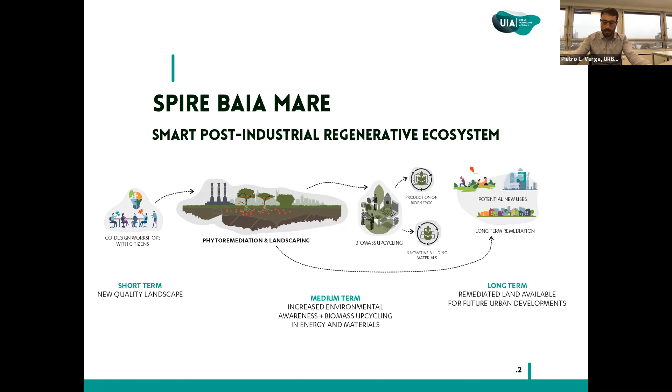And then we will also have, as a discussant, Amaya Celaya Hernandez, who is the Urban Innovative Action expert. So I will just give you a brief introduction.

Pol Merino is the managing director of Honext. He has a background in biotechnologies, and since 2015 is leading the industrialization of Honext, which is an industrial biotech startup from Barcelona that transforms industrial waste into new sustainable materials. They're implementing a growth strategy following circular economy principles and based on finding synergies with local industries. Pol will discuss upcycling paper mill waste into construction materials.

After Pol, we will have Tim Volk, who is a senior research associate at the State University of New York College of Environmental Science and Forestry in Syracuse, New York, USA. He has over 20 years of experience working in the fields of forestry, agroforestry, short rotation woody crops, bioenergy, and phytoremediation. He is responsible for a series of research projects focused on the development of shrub willow biomass cropping systems as a feedstock for bioproducts and bioenergy. He's also actively involved in research and development of sustainability assessment of bioenergy systems, life cycle assessments of willow biomass crops, and woody biomass from forests.

Tim's presentation will focus on the WILLOW project that he carries out at SUNY, and he will discuss energy and other applications of Salix viminalis.

And then, last but absolutely not least, we have Alison Mears, who is an AIA architect, associate professor of architecture, and the co-founder and director of the Healthy Materials Lab at Parsons School of Design in New York. She is the co-principal investigator of the Healthy Affordable Materials Project, a multi-year grant funded by the JPB Foundation. The project is a coalition of 4 organizations who work together to incorporate human health as criteria for evaluating building products to improve the interior environments of affordable housing.

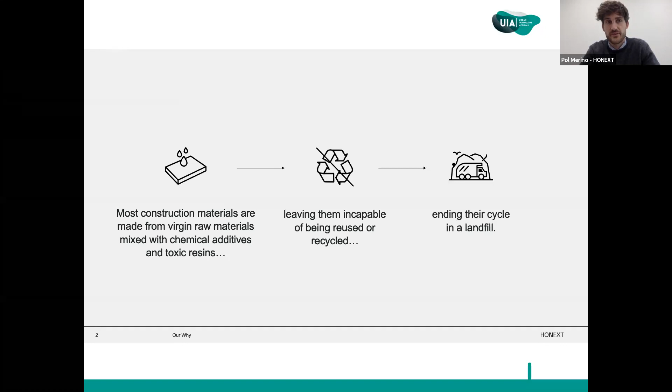If we can move on to the next one, please. So at the very end—you can go quickly through this and the next one—we are eating mountains and forests, we are destroying them to... can you move to the next one?

To end up filling landfills - in Europe, as an average, each citizen generates 1.87 tons of construction waste a year. And the construction industry itself generates one third of all waste in the globe.

To our understanding, that's totally unsustainable in the long term, and that's the main reason why we started with Honext.

Honext, what we do is pretty simple. We manufacture a material made out of 100% waste, ensuring during the process that we analyze everything we add to it to guarantee its recyclability at the very end of its use.

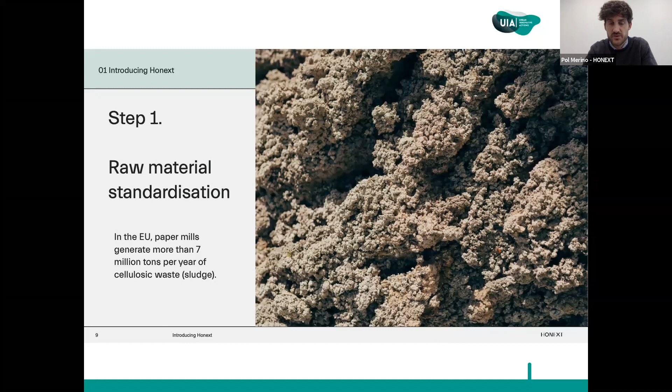Once we have this waste characterized, what we do is add a cocktail of enzymes that cleans this fiber and maximizes its ability to link with other fibers.

Cellulose fiber is an organic compound that has the natural ability to link with another fiber through hydrogen bonds. So the way we designed our process was, instead of adding resins to generate a strong material, to maximize the amount of bonds each fiber can make - so we get a healthy material without compromising its sustainability. That's why we use enzymes to prepare the fiber.

Once the fiber is ready, we undergo a mechanical transformation. If you can go to the next slide.

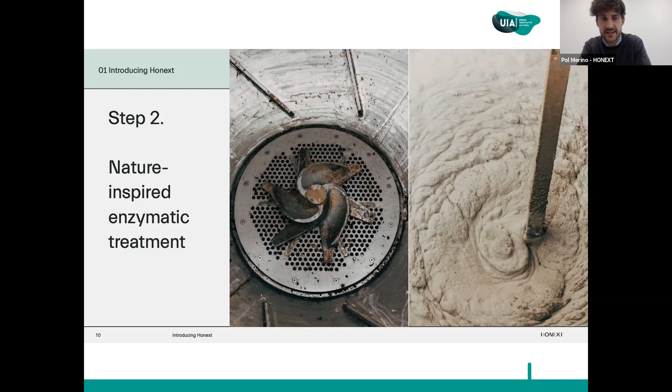We have a solution of now standard, clean, ready-to-link cellulose fibers in water, with a percentage between 3 to 5% cellulose in the water dilution, and we have to shape it into boards. That requires mechanical separation of the fiber from the water, which we do through positive pressure as well as vacuum technology.

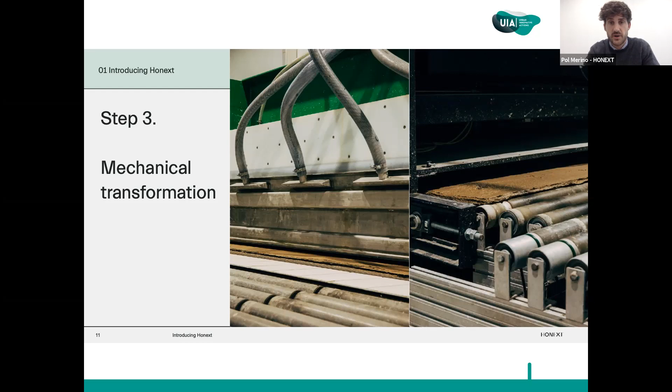At the very end, we have a wet board with around 50 to 60% water content that we need to dry in a drying tunnel.

This is one of the trickiest parts of our process. Cellulose, as it links together, bonds with other fibers when you extract water, especially during the drying phase.

If the way we extract water is not homogeneous along all the thickness of the board, the fibers start to link with other fibers in a heterogeneous way, and thus the board bends. Therefore, we have to have a pretty smooth drying process to achieve a board at the very end that has a perfect flatness.

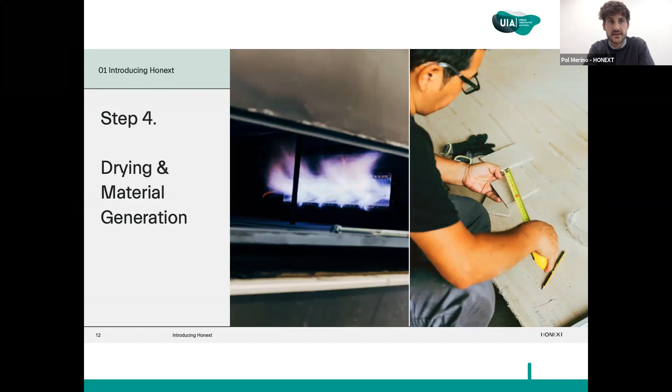To summarize a bit the process, the key of it is that we don't need any resins. We just use 100% of waste fiber together with enzymes, water, pressure and heat to generate a new material. The no need for resins, first of all, contributes to having healthy environments.

Other materials, especially wood-based materials, use urea formaldehyde resins that have emissions of volatile organic compounds. One of them is formaldehyde, which has been proven to provoke cancer in human beings. Especially in spaces nowadays where we've improved construction to be much more efficient and insulated thermally, it's critical to have inner spaces without volatile compounds in the air.

But also the resins, as we explained before, they contribute to other issues. A resin does not allow, most of the time, recovering a material or recycling it, and that's why we use none.

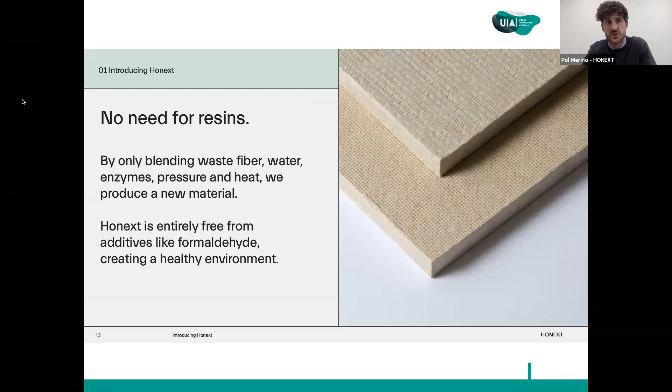If we can move to the next one. That, till now, is our product and the process of how we do it, but we developed that in a laboratory and in a pilot plant within the university. When we had to scale it up to industrial scale, we thought it's not just the product that needs to be sustainable, but the whole business model itself. So our first question was: where to set up a factory with the lowest environmental impact possible?

And we decided to put it in a landfill. The factory is placed in a landfill where all the process utilities we consume - gas, electricity, as well as water - come from waste. In terms of water, we have a water treatment station, so everything we consume at the very end is cleaned up again and comes back into our process.

If we have to highlight some of them, first of all, there's the sustainability of the material - we are Cradle to Cradle Silver certified, and we aim to achieve gold level in the next renewal. Secondly, not only do we not have emissions, but we also greatly improve the acoustics of inner spaces.

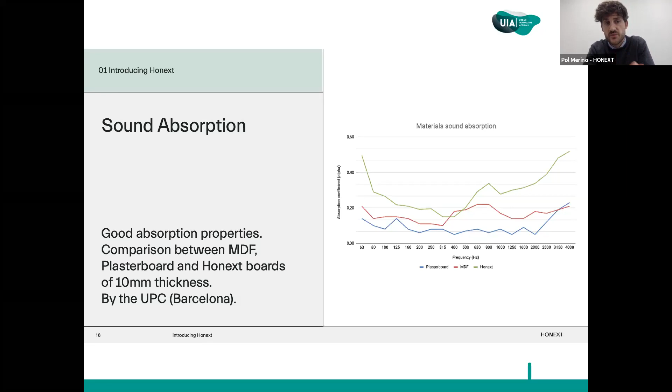And finally, reaction to fire. This is very important to highlight for us because using waste - in our case, fiber - it also has other inorganic compounds that are used in the paper production process. We could see this as a disadvantage because at the very end it limits our mechanical strength, but it also gives us a very good reaction to fire.

Without adding any additives, our material is a Class C reaction to fire. That allows us to be used in most construction projects in Europe, and now we're working to achieve a Class B, which is the maximum we can reach with a bio-based material without adding toxic or chemical compounds.

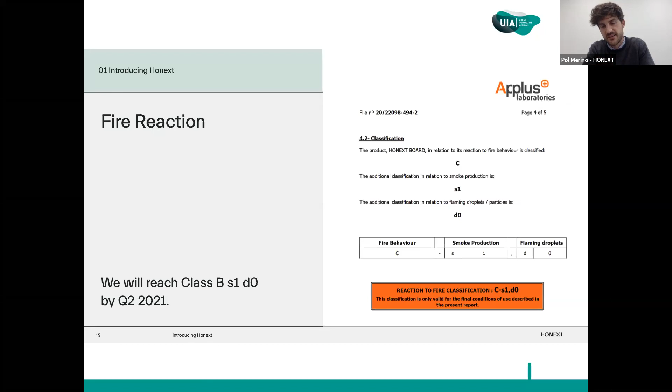Finally, as a market, our target is MDF. Clearly, it's a really complicated market. MDF, in terms of technical properties, is an amazing material, but that's it - in terms of sustainability, it's a completely linear economy material.

So in Europe, to give you a rough idea, we consume 16 million cubic meters a year of MDF, of which 2.5 million are consumed in construction. Our factory right now has a capacity of 2,000 cubic meters a year. We do believe we have a lot to improve in terms of materials.

All sustainable materials, or at least the way we see it, we start with the disadvantages, and it's that we cannot use as many additives as MDF would use to improve properties, but there are many options available. It's a matter of trial and error and improving, and we do see a lot of potential to end up replacing this type of fiberboard.

Here you'll see some of the last projects we've done. As I said before, it's a material for internal partitions in construction. It can be transformed using the same sanding and cutting machines as any fiberboard - that's not a problem. Obviously it's slightly different as it has no resins, so sometimes it behaves slightly differently, requiring just small adaptations in the transformation processes.

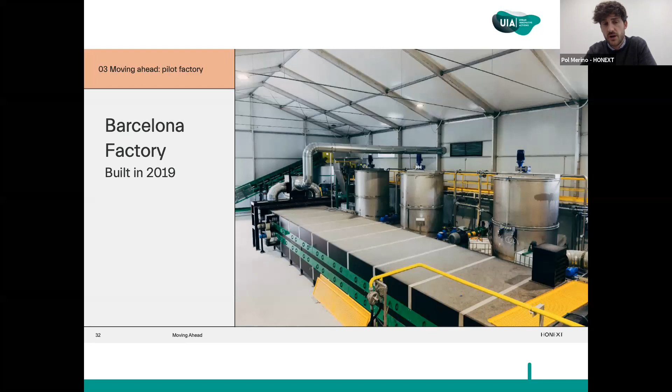That's what we think—it makes no sense to destroy mountains to fill up landfills. We need to achieve a future where landfills become mines, because there's a lot of waste that can be reused. The current situation highlights even more that things should be made locally, or on a regional level, to avoid the huge environmental impact of transport.

This is a short summary. First of all, we've been funded by the European Commission within the Horizon 2020 program. It has helped us a lot—they funded the startup of the factory as well as the initial market introduction. This has allowed us to really focus on what brings value in the mid and long term, not just the short term. We're also supported by some important groups, especially in the construction sector here in Spain. Well, that's about it.

If you have any questions, I'm more than happy to answer. Thank you. So we are in.

Thank you very much, Pol. That was really interesting, seeing how from ideas you can really make a difference. And that was an interesting point on the difference and the need to match the coolness, the hype that new materials generate for designers, with the technical feasibility problems and difficulties faced by the carpenters and all those actually called to practically use the materials.

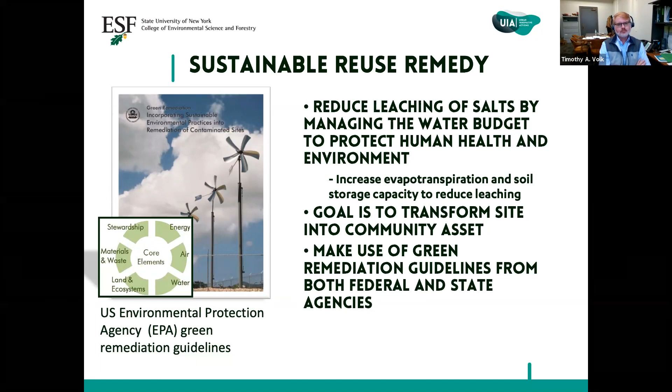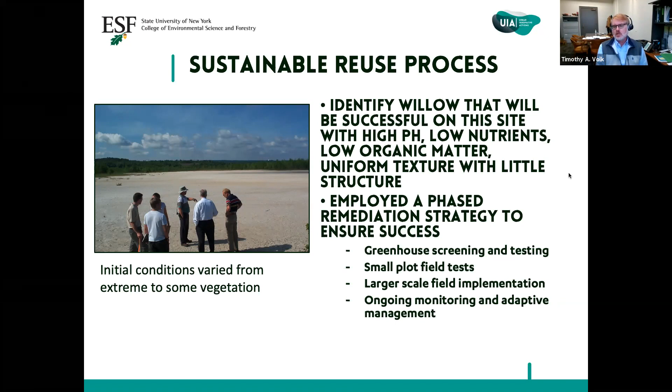There's no textural structure to this soil to work with. It's very challenging. We employ what we refer to—what colleagues I work with have developed and referred to as a phased remediation strategy. So we work through a series of incremental steps to try and make this work, adapting and modifying as we went along. I'm going to walk you through a few of those steps, and then we'll talk about end use applications when we get to the end.

Okay, so why willow? There are a number of attributes about shrub willow that make it appealing. It's not the only species, but for what we wanted to do in the package being created, it had the right attributes. It's a pioneer species that works well and grows naturally on disturbed sites, so it's used to dealing with harsh, unpredictable conditions. It's easily propagated from woody cuttings, so it's easy to scale up and multiply fairly easily. Willow has a high transpiration rate.

Some people might say it's an inefficient user of water, and that's true—it uses more water per kilogram of wood that it produces than most other woody species. In this environment, that's exactly what we want—we want it to pump off more water. You can harvest it, cut it down, take the biomass away and use it—we'll talk about that at the end of the presentation—and it will just sprout back. Once you plant it, you can manage it in a 3 or 4 year harvest cycle and have it keep sprouting back. You don't have to replant it, and it's relatively easy to manage.

There's huge genetic diversity in willow—over 300 species around the world. We had been working on willow here at the university with some other colleagues for 10 or 15 years already, so we had a fair amount of experience in terms of what its potential opportunities might be. There was also a history of willow being used in this region for the basket making industry. This was the heart of the willow basket making industry in the early 1900s, and you can still find those willows across the landscape if you go out and look for them.

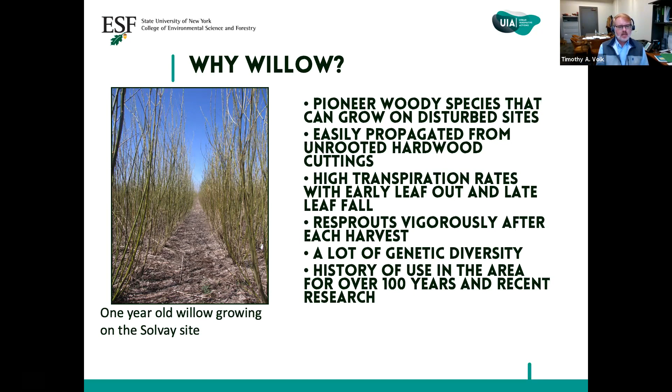We had organic materials from a local brewery, from a pharmaceutical company, from the wastewater treatment plant, and from another company that was producing biosolids. We tried these different mixtures in the greenhouse to first get an idea of what might work. The best one was from the pharmaceutical company, and it really worked well. Unfortunately, a few years later, that company decided to move their production process to another location, so we lost that source material—but you adapt and move on.

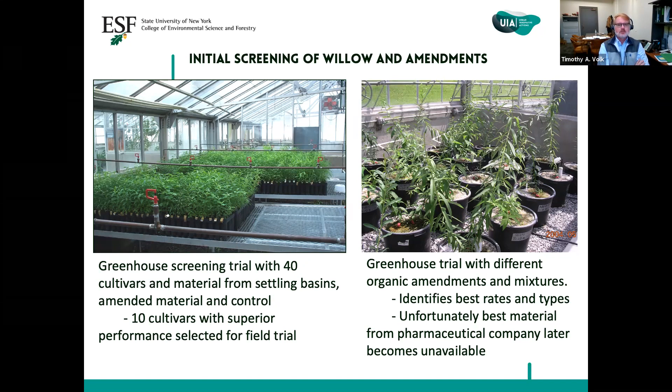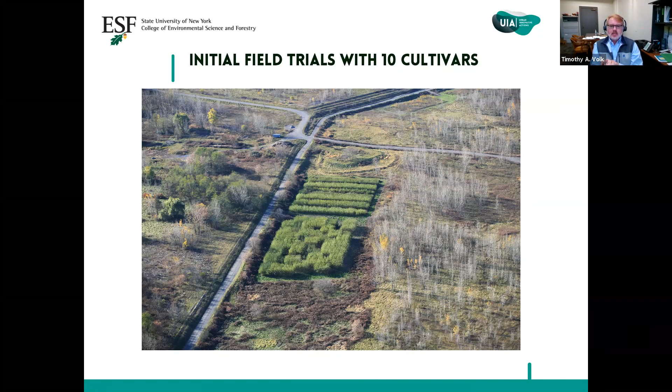Next slide, please. So the next thing was to go to the field. Remember, we had these 10 cultivars that we identified. This picture at the bottom shows this block with different squares in it—those are the 10 cultivars from the greenhouse trial put out into a field trial. It's fairly clear there that some things are not working. So it's important to follow this through the process—what works in the greenhouse in a controlled environment is wonderful, but we eliminated 30 varieties that probably weren't going to work in the field. If we go to the next slide, I'll show you some data that this did not work so well in the field for some of these varieties.

So you can see this one I have circled called SV1. That actually produced the best in the greenhouse. By the second rotation, it was totally dead. So you learn lessons as you go along. SV1 did well in a greenhouse environment, was controlled and watered regularly. You put it out in a real environment where rainfall is sporadic and you have dry periods and other pests that may be an issue, and it didn't do well at all.

However, there are a number of varieties. That green bar is the sort of yields and biomass production we get on good mineral sites in the area. And so we've got a number of varieties that are growing just as well as they do on mineral soils in the area. So that's success. We can move forward to the next stage.

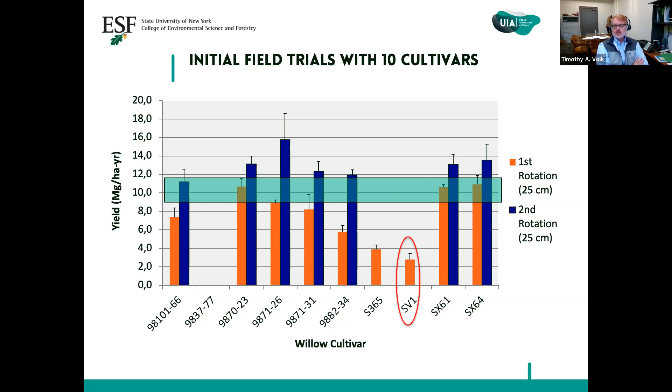Next slide. So the next thing was to go out and figure out this organic amendments question. And so we take that greenhouse trial, and here's another trial we go out, and we put out blocks of different amendments. Lots of interesting stories around this, around working with the community and the timing of it and their concerns about odors and lots of issues like that. And so it took lots and lots of interaction to even get to this stage and to make this work. But we put this trial out and we learned some lessons, and it allowed us to make some recommendations then to begin the commercial scale up, larger scale up of this material.

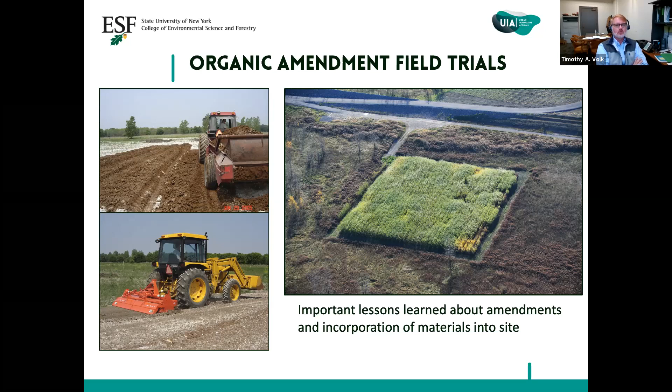So if we go to the next slide. So here it is. You can see in that picture on the right, that green plot on the left is this organic amendment trial that I just showed you. So that's where we did that testing with 8 different organic amendment treatments in there, plus a control.

Then we go across the road there, and we tackle this very challenging site that I showed you at the area. So at the beginning, this is this area where there's virtually no vegetation. The company challenged us, Honeywell challenged us and said, look, if you guys can make it work there, we'll believe you, right? And then we'll talk about expanding it to other areas. So that's where we started.

And you can see that there's 2 different colors being mixed in here. This sort of brown, dark brown, and a dark material. So we're still testing 2 different organic materials out here because we're not entirely resolved. There's a couple of things, which one works the best? They both seem to have potential. And then there's issues about supply down the road.

So if we're going to scale this up over a couple hundred hectares, having some flexibility in your organic waste material that you're going to use is beneficial, because maybe the facilities that are there are not going to produce as much as consistently over time. And so we wanted to maintain those options.

In the end, we've actually modified in the last few years, and we've started actually mixing in horse manure. There's a fair amount of, for recreational purposes, horses maintained in the central New York area. So there's a lot of horse manure. There's a company that started collecting that and mixing it with the brewery waste that we were already using. And so that's the material we've been using for the last few years.

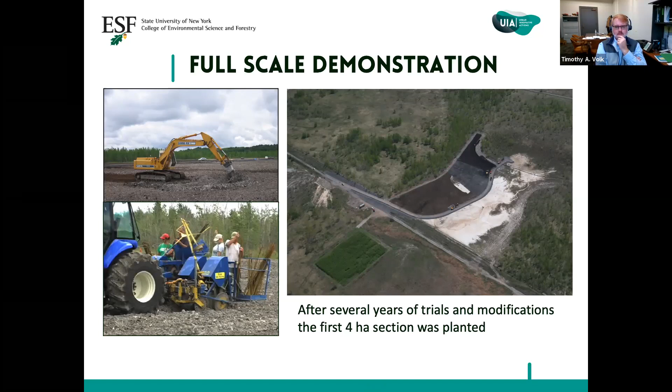So where are we at now? We've now installed the first 40 hectares of this WILLOW ET cover, and you can see a picture of that here. This is what is called one of the settling basins. There are several more. There's another 140 hectares of area that this could be applied to. We are currently in the process of going through a regulatory review with the state agency for them to determine whether this is an acceptable solution to the problem or not.

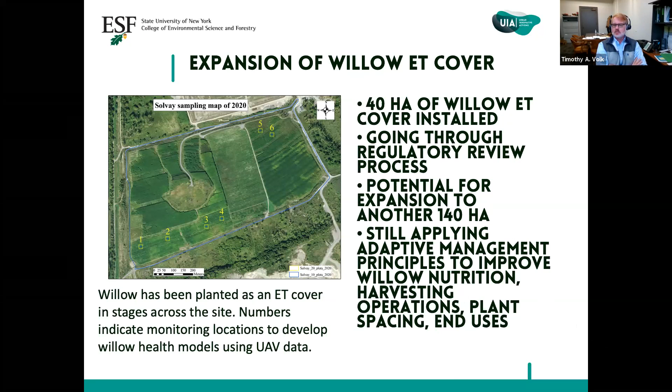We're still learning. Those plots out there, we're out collecting data to try and optimize willow health and willow growth, and now using UAVs to try and do that at the scale of area that we have now. Go to the next slide.

So we've done other things, right? There's lots of things we've looked at. We've looked at, well, here's greenhouse gas emissions. And so clearly big benefits to be had here.

So what you have here on this scale on the y-axis is global warming impact in kilograms of CO2 per hectare of land where you put a remediation practice in. You have the willow ET cover versus a typical clay cover or geosynthetic cover. That green line through the willow ET cover shows you it actually has a negative carbon footprint over a 30-year period—it's taking up more CO2 than you're expending in fossil fuels to run harvesters, planters, or spread organic matter. So it's got a negative footprint versus very large footprints. There's big benefits to be had here.

And we're now here in New York State at a point where we're going to start in 2021—the state will start requiring an accounting of carbon benefits and put a dollar value on it. This is going to be important when regulatory agencies start looking at these kinds of processes and make these kinds of decisions. The other thing we do on this site, as I've mentioned, is we harvest it off every 3 years.

So every 3 years we harvest it off. I'll just mention there's a lot of other benefits—we've done work on biodiversity and soil benefits and lots of other things associated with this. So there's lots of other added values being added in.

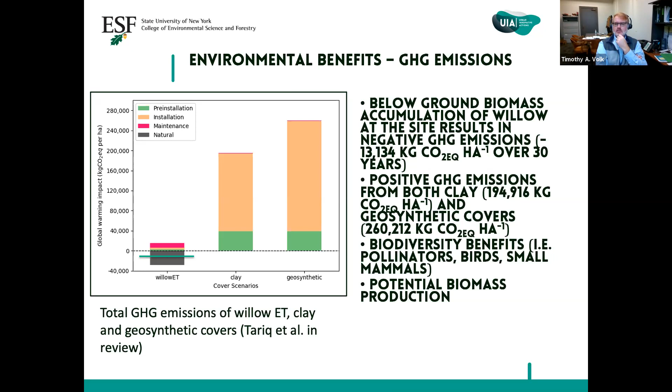So we're producing chips, and there's various options. We can use chips directly in heating applications, combined heat and power, or just electricity. Right now there's a company in upstate New York that produces electricity using all biomass—most comes from the woods, but about 2% of their supply now comes from willow fields planted here in upstate New York. So you could put it into those kinds of things. There's also other things like mulch markets that have potential out there.

In the longer term, we've done lots of work—I work with colleagues in chemical engineering, environmental engineering, and paper and bioprocess engineering. Those folks all take wood and turn it into other things. They've done work making biofuels, ethanol, renewable diesel, things like that, and biodegradable plastics. Those things are all possible, but they haven't been scaled up beyond the lab at this point. We're working on those to try and show the potential to make use of these wood chips for those kinds of things.

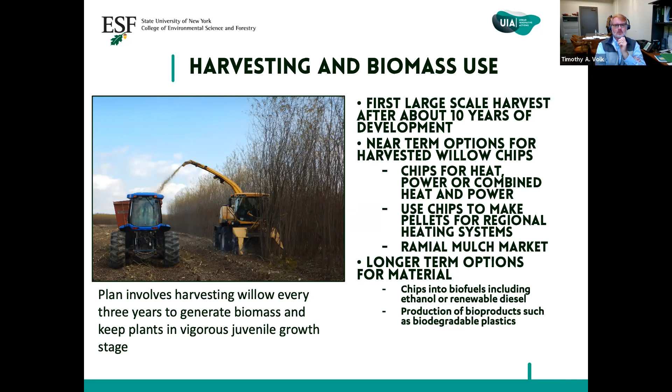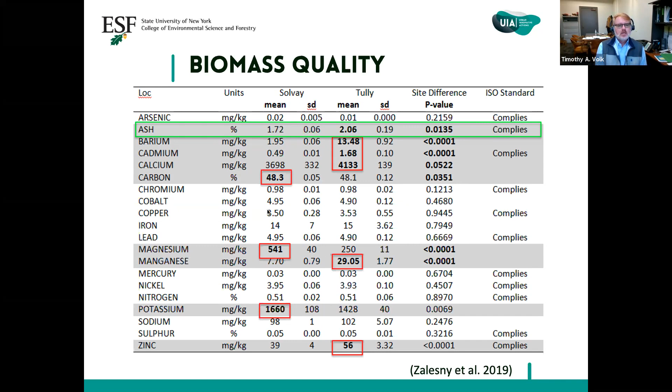Next slide. I think this is maybe the last thing I want to talk about. So where we're at now is the trial we're going to run this fall: we're going to take around 100 megagrams of chips from the site and send it off to a pellet manufacturer we've been working with for a number of years, and he's going to make pellets of it, and we're going to return it back.

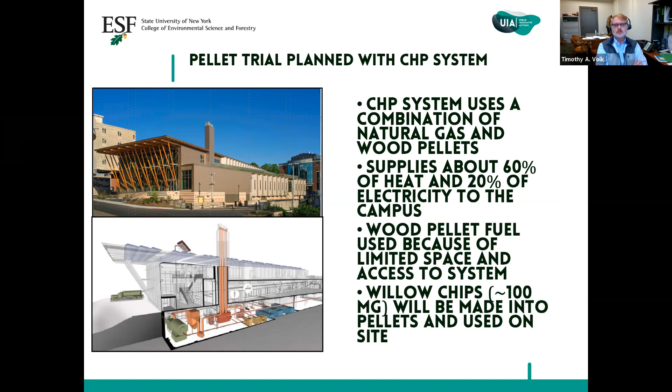The idea is that we're going to take material off this site and turn it into pellets, bring it to the site, and use it here in our combined heat and power, creating this loop. The plan is then to take the ash generated from that biomass system and put it back on the site. It's got nutrients that are depleted at the other site, so taking that material back and distributing it onto the willow fields for the next rotation creates this closed loop cycle.

I will wrap up there in the interest of time and am happy to answer questions later during the discussion. All right, thank you very much, Tim.

That was really interesting, and it's really important for us to exchange on a specific plant such as Salix, or Willow, which we're actually trying to use in biomass, even though we're trying to have shorter coppices, trying to have a harvest like every year or every other year. We will of course investigate, and our technical partners may have some questions afterwards in the discussion.

Now it is my pleasure to move forward and discuss hemp-based materials for housing construction and renovation with Alison Mears from the Healthy Materials Lab at Parsons School of Design. Thank you very much, Tim, for your presentation. Alison, the floor is yours.

Thanks, we can go to the next slide. Thank you, and the next one. Great. Hi, so we established the lab in New York City in 2015.

Today I'll present an introduction to the topic of material health. Paul and Tim have already touched on it a little bit, but it's foundational to our work and the way we frame our research, so I thought it would be an interesting thing for us to review a little bit.

Next slide. Like Tim and Paul, we also have relationships with a number of partners, and we're funded by a grant from the JPB Foundation. Next, please. So we work with a broad range of experts exploring the relationships between human health and building materials.

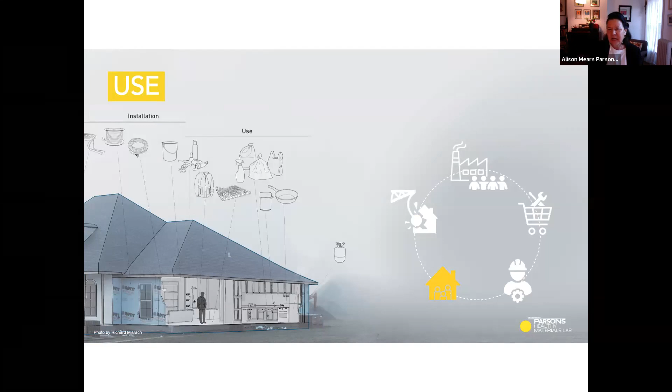In use, which is the area we focus on a lot, these products emit hazardous toxics into the interior and exterior environments. Next slide, please. Our bad decisions have negatively impacted the entire ecosystem, ourselves, and the environment as well.

Next, please. Materials that are used to make our cities are becoming part of our biological systems. These materials shed and release chemicals into our environments, which are then absorbed into our bodies.

Next, please. And this is the challenge: we spend most of our time indoors, and our indoor spaces are filled with invisible chemical hazards, making indoor air 2 to 5 times more toxic than polluted outdoor air.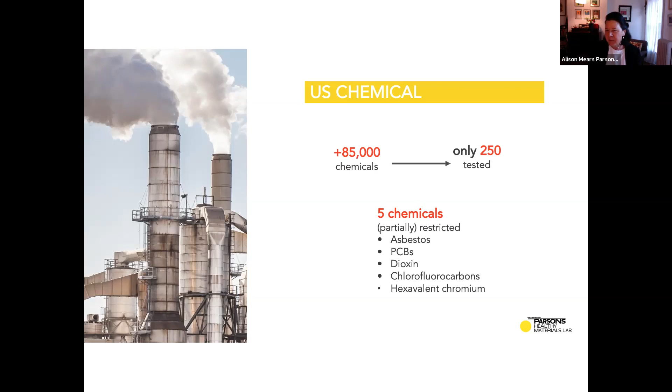Surprisingly, in the US, many chemicals are not regulated. Only 250 of the over 85,000 chemicals currently in use are tested, and only 5 have been partially restricted by law. These chemicals are not benign, but are becoming, as I said, part of our biology.

Next, please. We often think of products as static, but over time materials break down and chemicals are released through off-gassing, as dust, or as chemicals become unbound and are released into the environment.

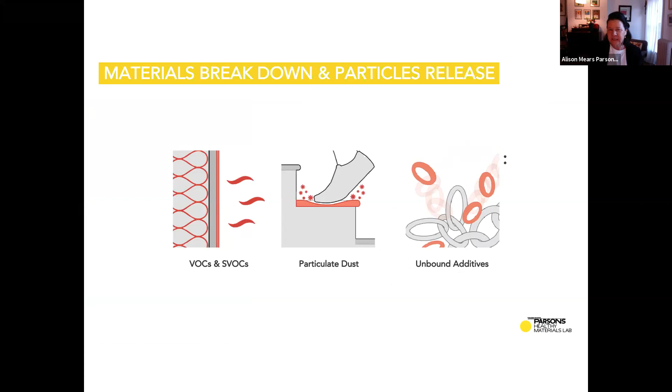Next. And this is where they enter our bodies, either through breathing them, eating them, or being absorbed through our skin. Next, please. So how do these chemicals in our built environment impact our health?

The research study called the Exposome Project has identified that genetics determines only 10% of human diseases, with the environment accounting for the other 90%. The exposome measures all of the exposures, including chemical exposure, in an individual over a lifetime, and how those exposures relate to health.

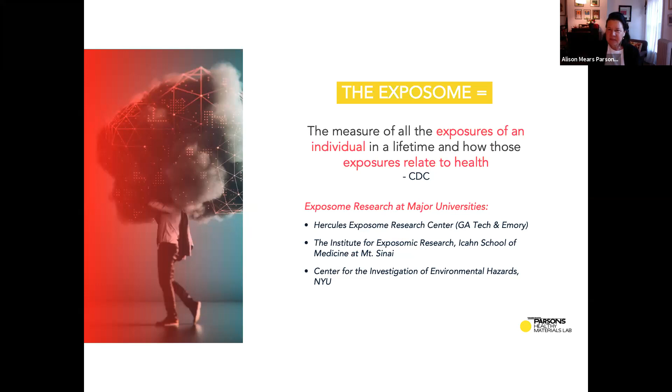The remaining 90% of disease are triggered by the social determinants of health, economic and social conditions that determine individual and group differences in health.

Chemical exposure is a systemic problem. A report published in 1987 by Dr. Benjamin Chavis documented the location of unregulated toxic waste sites in largely Black and Hispanic counties in the US. Dr. Chavis coined the term environmental racism to respond to the findings in the report.

If we look today at where chemicals are produced in the US and where exposure and release happens, we see it occurring similarly in these same communities as what was happening 30 years ago.

As we look at COVID locations and relate those to zip code, we see these same overlapping statistics where underserved and marginalized communities are actually more at risk of COVID than other communities.

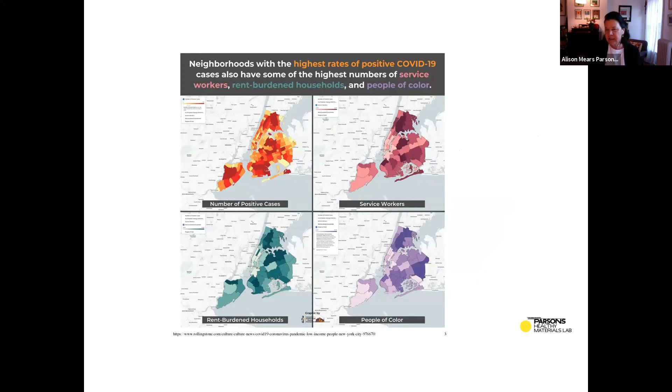It's critical that we build healthier and more resilient communities. Obviously, this is the object of our work. Dramatically reducing people's exposure to harmful chemicals is a public health priority and linked to this reduction of a range of human diseases.

We look at how we are routinely exposed to chemicals in common building products. These common building products release a range of hazardous chemicals into the environment, causing cancer, asthma, and impacting infertility. But in the US, it's difficult to know the content of the products we live with.

We do know what's inside of food products. Listing these ingredients is regulated, but this is not the case with building products.

So we advocate for chemical transparency, so that once we know what's in a product, we can look for better choices and identify better alternatives.

We're focusing in this presentation on this wall section. A typical US wall section contains at least 7 materials, many of which are made from petrochemicals or contain substances that are harmful to human health.

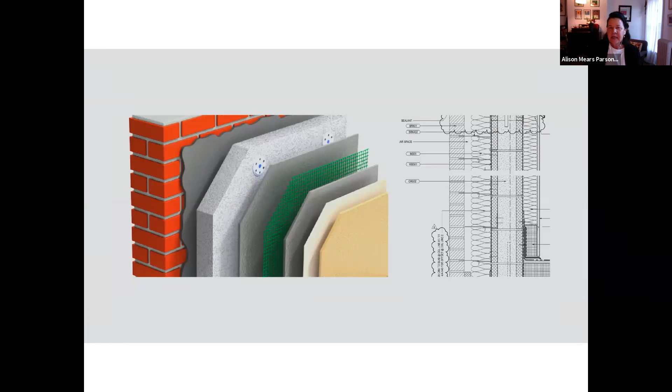That's the issue. So faced with all of these problems of chemicals in building products, we look for alternatives. Through this, we've identified this combination of industrial hemp and lime, made of hemp hurd, often considered a waste product from hemp fiber production, water, and lime. With hemp lime, the wall section can be simplified to 3 layers, all containing the same ingredients of breathable materials.

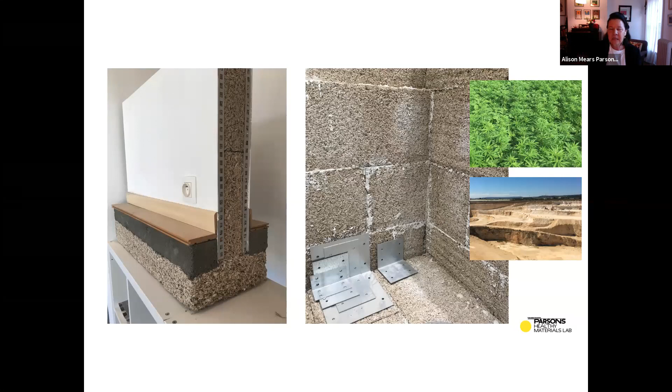The benefits of hemp and lime are impressive. It's a better alternative to typical building materials, and we think that this material has the potential to make systemic change in a range of industries.

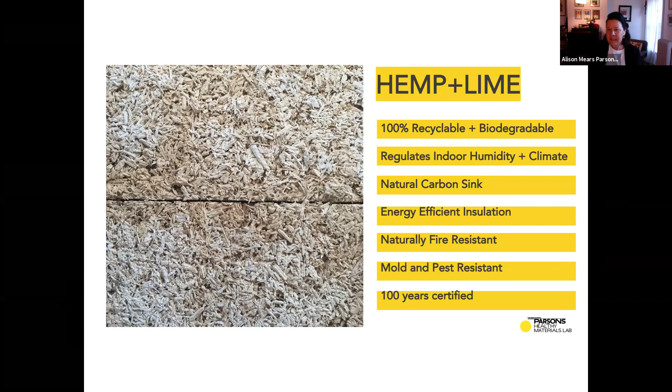I, like Paul, love these systems diagrams. As we think about the use of this crop and lime, we think about how we can create these beneficial systems. Industrial hemp is a new crop in the US, legalized in 2018, so there's a lot of knowledge that needs to be accumulated in this agricultural part of the system. Also, the way that it binds with lime needs to be explored.

We think then with this combination of these 2 ingredients, we can start to imagine this new system that combines them into better building products.

We began this process, researching hemp and lime for the last 2 years or so. In January 2020, we started to bring in students from Parsons to look at the innovation and practice implications, beginning with just making hemp and lime in a workshop.

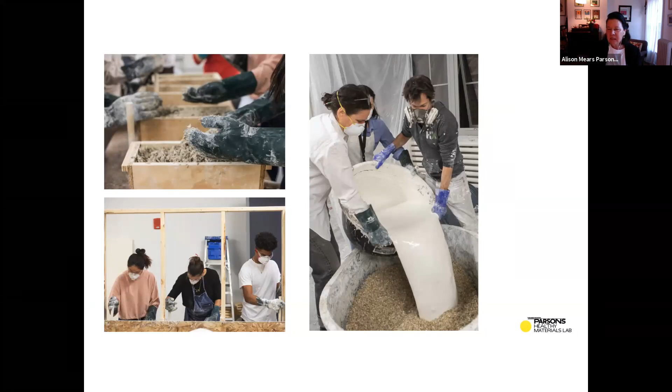Architecture students have seldom had the opportunity to actually have hands-on experience and work at full scale, so this was a great introduction to a studio where they could look at the physical properties of hemp and lime, the mixing of them, the sensorial qualities, and the limitations. They did both cast walls and also some block making.

We center our work in areas that have typically suffered through post-industrial decline in the US, similar to what Tim is looking at in the north of New York State. New Castle, a city in Western Pennsylvania, has gone through this deindustrialized process and has a number of abandoned timber balloon frame houses.

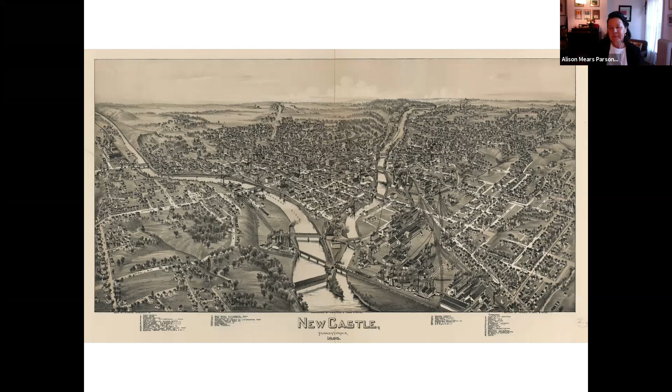Our partner in this effort in New Castle is Dawn Services, an affordable housing provider particularly focused on accessibility. They share this vision with us that hemp lime buildings and the whole system that fuels them could be a huge opportunity.

So the Masters of Architecture students went through this design process of looking at and comparing what it might mean to transform an industry from a petrochemically based wall system to a new system of hemp lime, particularly focusing on renovation versus new construction cost. You see here the savings associated with renovation, this 43% savings with renovation, and that's not only savings in dollars but also savings in carbon emissions.

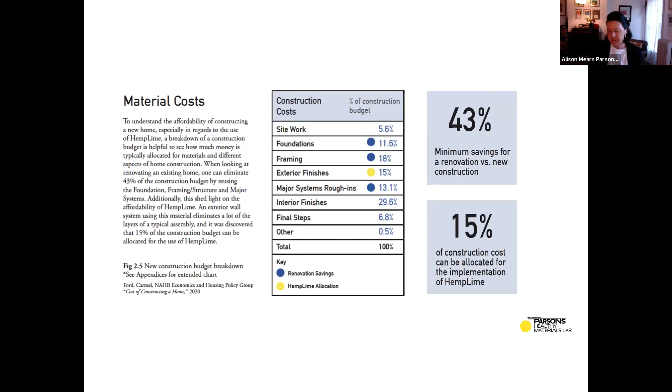We also looked at the goal of scaling up hemp lime construction and how it could participate in a traditional construction sequence, looking at how using precast hemp lime components could accelerate the construction process.

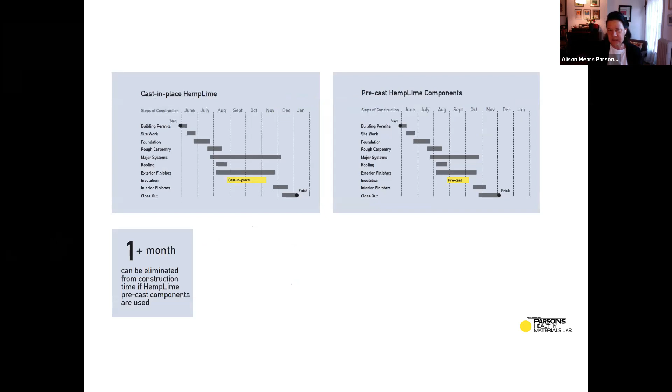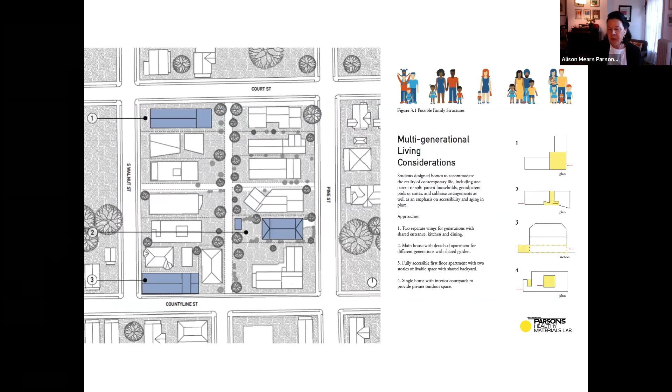The students were allocated sites in New Castle, 15 sites, 15 students, and asked to consider the future of the American home, both in terms of new construction and renovation. They came up with a variety of different design responses to the site, the city, and this material. This for us is very important—we want to really explore the design opportunities available if we were using this product.

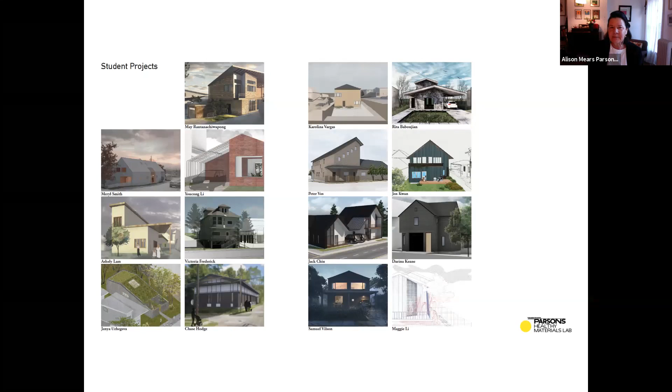This proposal, called House with Two Porches, was proposed by Samuel Wilson. He creates a very simple form—you can see him exploring the wall section there, which is obviously the focus of the studio. But he was also interested in this new American house, how we could account for a variety of different family groups, and how we could work on any site.

Meryl Smith's rafter house takes the ubiquitous roofline shape of American houses, extrudes it along its narrow site, and creates a generous outdoor space that is fully accessible.

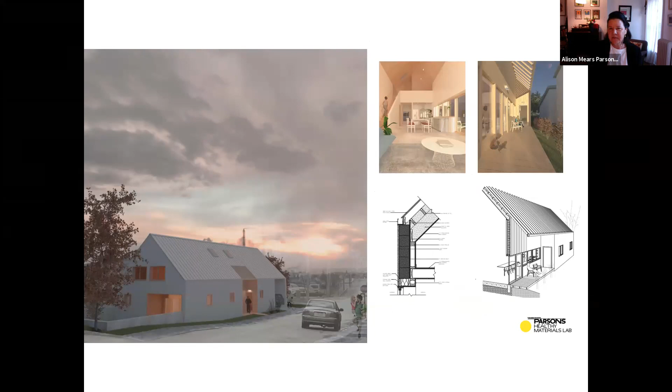So this was a semester full of obviously disruptions, but also a semester of many insights. And we continued at the end of the semester our collaboration with Dawn Services, in particular looking to renovate a wooden balloon frame house in New Castle with hemp lime as a prototype for the future.

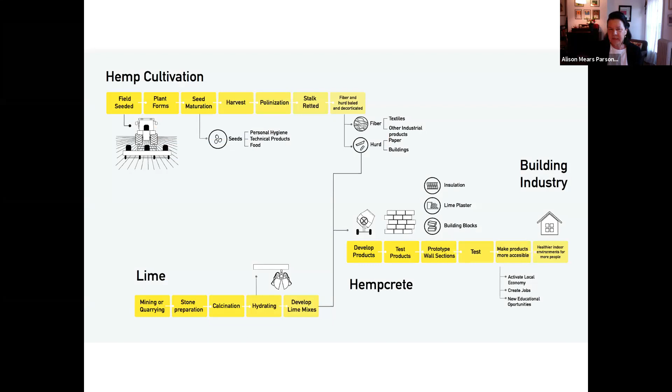First of all, we looked at agriculture, and this affordable housing organization is amazing—they wanted to look at whether they could cultivate their own hemp, so they're looking at that beginning of the system in agriculture.

In the summer of 2020, they planted 14 acres of fiber hemp in 4 counties. They experimented, again as Tim was saying with his WILLOW project, with only a few seed varieties—they hoped to get 4, but just access to seeds is very difficult. They tested a number of planting methods to see what was most successful, and they had a good season.

They were able to take the harvest, and working with a local innovative material producer, they're incorporating some of their harvest into this new hemp wood product, which has some viability and interest, and that will be used in this next project we're working on, which is the Pennsylvania hemp house.

Using this very small, simple house as potentially a demonstration about the viability of incorporating hemp lime—using hemp lime in a structure like this would introduce energy efficiency, make the wooden structure flame resistant, and create this healthier indoor environment, this breathable wall for the future owners.

And this is the challenge: typically these wooden framed houses are really susceptible to fire, so this new product would help overcome that problem.

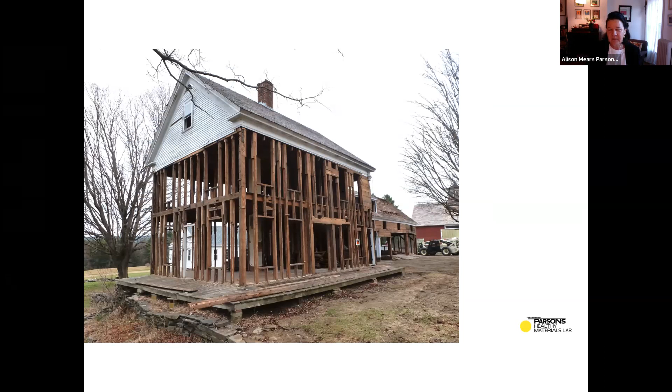So currently in the US, hemp hurd and lime binders are imported from Europe, which is crazy. Paul talked about this, we need to create local industries. So how do we accelerate this production of local lime mixes to combine with locally produced hurd to advance our goals?

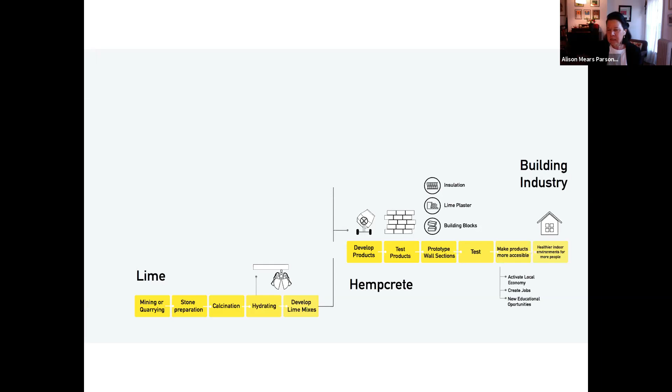Another colleague and partner in the New Castle project, Cameron McEnroe, is exploring a number of different techniques. One is this blown technique. He uses a hemp lime spray to insulate an existing stone wall.

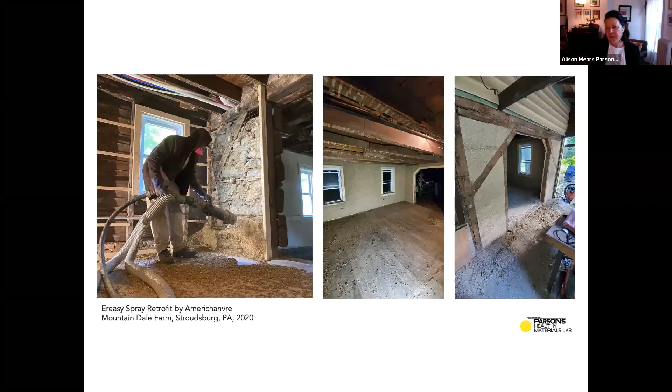He's also working on creating a lime binder made from limestone found in New York and Pennsylvania. So we know that hemp lime blocks are produced in Europe, and they offer examples of accelerating installation and construction.

We've been involved in local production of hemp lime too, in factories in Pennsylvania, first in Eastern Pennsylvania and more recently exploring it in Western Pennsylvania near New Castle.

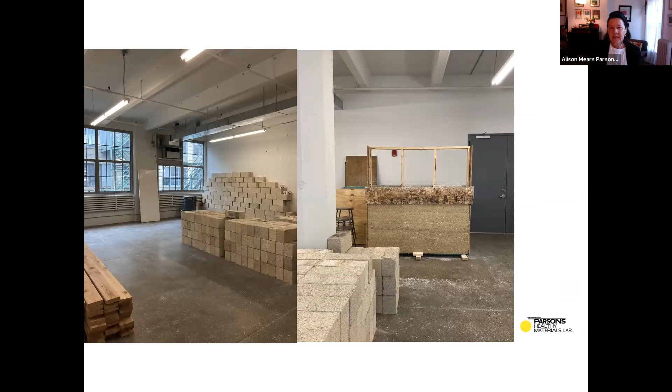Finally, one of the final hurdles to overcome is to convince local building codes to change their codes to be able to incorporate a new product like hemp lime. Creating a full-scale mock-up like this allows local code officials to understand exactly what the physical properties are and the manifestation of this new product is in a kind of reality. That will help, we hope, overcome some of their concerns for this product.

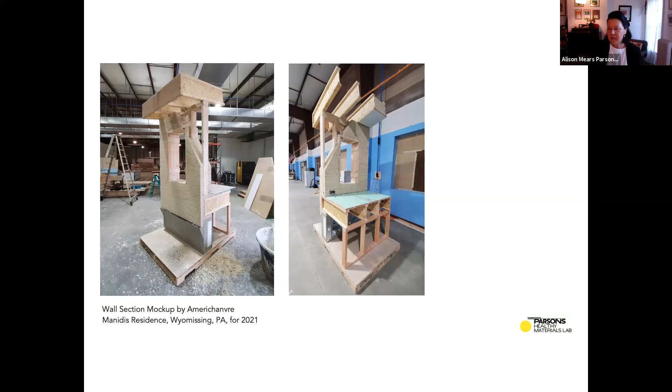So we're excited about this potential for New Castle to prototype hemp lime affordable housing. We think that it might be a prescription for the future, for renovating many of the abandoned houses in the Northeast and Midwest, for renovating housing to be healthier, affordable, and made from locally sourced materials that invigorate local economies.

We have a booklet that we've created that explains a lot of our research to date, and you can download that from our site if you're interested. We also have a podcast, the first season was focused on hemp, we're excited about. So take a listen, Trace Material, wherever you find your podcasts.